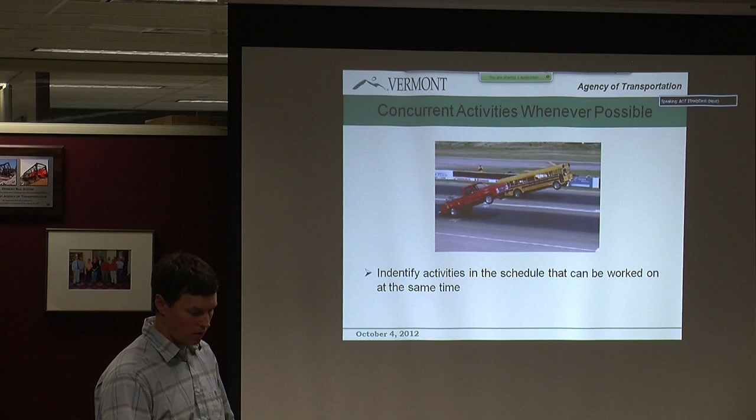Exercise flexibility to reach new heights. This is what we're all trying to get for you folks, really, and Jen mentioned it earlier about getting you folks to look at ways that you can exercise flexibility in the activities that you do.

For example, we've had NEPA documents completed with one layout sheet. I know there's activities in right-of-way that you can do before the NEPA process is complete. We've had a couple of ER projects go through where we submitted pre-contract plans and final plans at the same time. So again, it goes back to the concurrent - getting processes and activities to happen concurrently to help speed along the process.

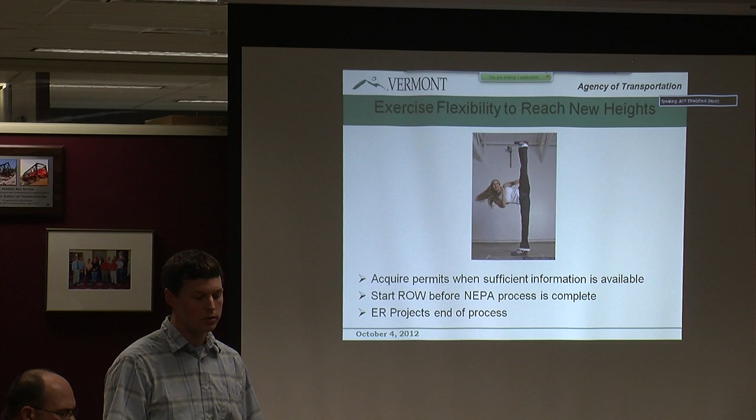So this is really about getting you folks to be flexible in the standard way, kind of repeating what Wayne said earlier about looking at your activities and seeing what you can do to be flexible with the rules, and help us along with accelerating projects.

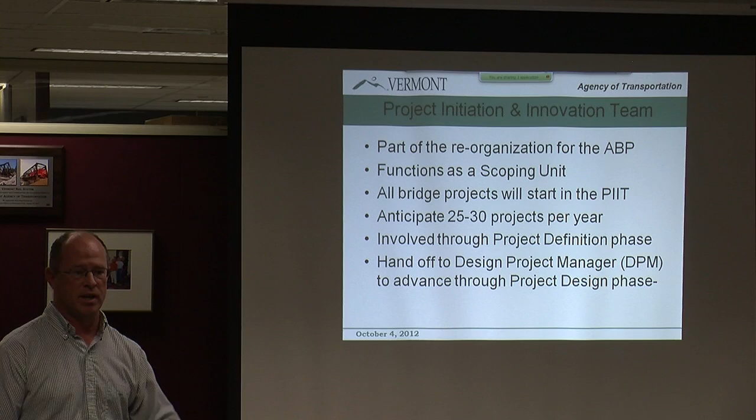The idea is that all projects that come into the bridge section will all go through the PIIT before they get sent off. We anticipate about 25 to 30 projects per year - that's what we're thinking will be about a steady state coming in and going out. We're going to be involved through the project definition phase, and then when we're done defining the project, we're going to hand it off to the design project manager, who will carry it through the project design phase.

Before the PIIT, there were some problems with the way we did things. We knew there was some room for efficiencies. What would happen is we'd get a slug of projects and distribute them to all the different project managers. At that point, we're all competitive people, especially Kristen and I, and we'd start competing for those resources, trying to get it in the schedule, and all the project managers would be competing for moving their projects ahead.

And this made it really difficult for the resource groups all the way along the line. They'd get all these requests at the same time from different people, didn't know how to prioritize them, made it really difficult for those folks.

The other part of it was each project manager has a different tolerance for how much risk they want to take. It's sometimes a little bit of a struggle bringing innovative things through, and some people like that struggle and others would rather just move ahead. And so what that created was different, inconsistent approaches to projects.

In the PIIT, the idea is we have a consistent way of looking at projects - we know the technology and the tools available, so it's a much more consistent approach to our scoping process now. We have a few focus areas.

We have a lot, don't have much time, so I'm only going to go over these.

First is early coordination with stakeholders. The idea of the old days where a set of plans would be plopped on your desk and they'd say do this, they're gone. Right now, you're all going to be involved day one. We're going to get you early on in the process, and we've had some really good success in getting stakeholders involved early. We want to streamline the process as much as possible.

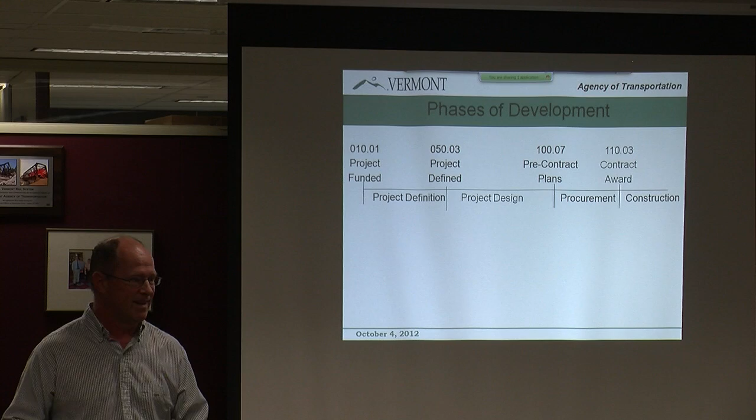And we're not there yet, but it's a starting point. So we need consistent milestones in order to measure.

We're going to add new data fields. The old days of having a spreadsheet with a list of projects that are in the Accelerated Bridge Program, they're gone. Nowadays we have a field that we've created, Screen 36 in PPMS, where we can say Accelerated Program, Bridge Program, yes or no. So we're creating these new data fields as needed so that we can use them and provide that information in a much more efficient way.

We've got to get the baseline data. We don't start by saying we want to meet certain expectations - well, we do start with some expectations, but really it's about capturing where we are now. If you don't know where we are now, you don't know where you've got to go to. And track changes over time - delta T for those engineers out there, right? We want to report quarterly or monthly, and then we want to see what the change is. Are we getting better? Are we getting worse? How are we doing?

So we have to start that way, and then the most fundamental, basic, important thing here is we have to see how we're doing and then revise it and change it when necessary. That's a really important part. It's really hard to talk about performance measures in 5 minutes or 3 minutes or whatever they've given me, but I'm going to try.

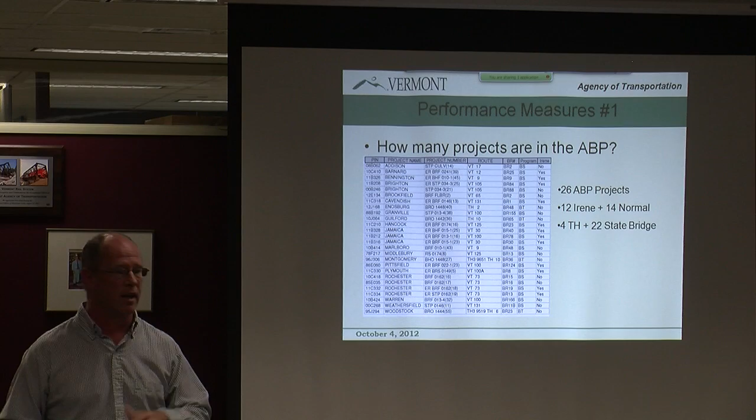This is a screenshot of a query that I did on the bridges in the Accelerated Bridge Program. There's 26 of them: 12 are Irene projects, 14 normal, and there's 4 town highway projects and 22 state bridge projects. So we have all this data, it's all in a database somewhere. Everybody here can query on it and get this information just like I did here.

There's some other measures that we're looking at. What percent of all projects are in the Accelerated Bridge Program? So of the 42 projects that were funded in 2011, 15 of them, or about 36%, are in the Accelerated Bridge Program. That's pretty good, that's above where we really wanted to be.

2012, we're down to about 15%, and I'll note that it's because we haven't finished the project definition phase yet. There will be more, and we're expecting somewhere in the 30s for that as well.

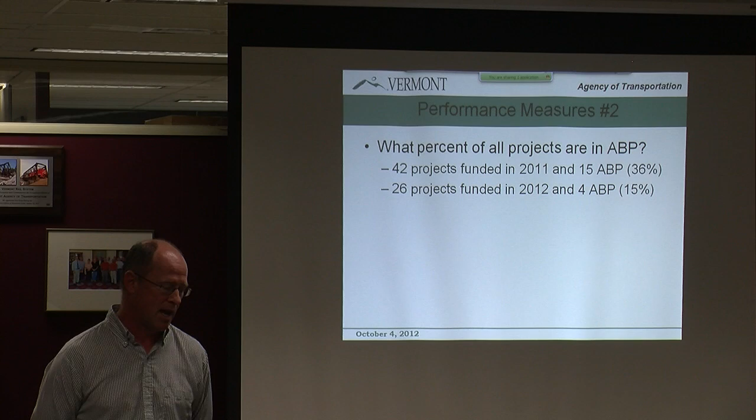And the duration of project definition phase, that is my group moving from funded to project defined. Again, we've got to break it down by years, and 14 projects in 2011 range from 9 to 463 days. Here's my point: because we didn't have a consistent way of doing this, everybody was defining the project differently, and so we have this really, really wide variation because nobody was that concerned about making these consistent like we are now. You can see in 2012 there's only a couple of them, but it's really improved.

Getting through that process for the ones that were funded in 2012, we got through it in somewhere around 6 months or so. So it's giving us some data. We know that some of the data now is pretty bad stuff. I took out the negative durations, I will add, when we went through it in negative time.

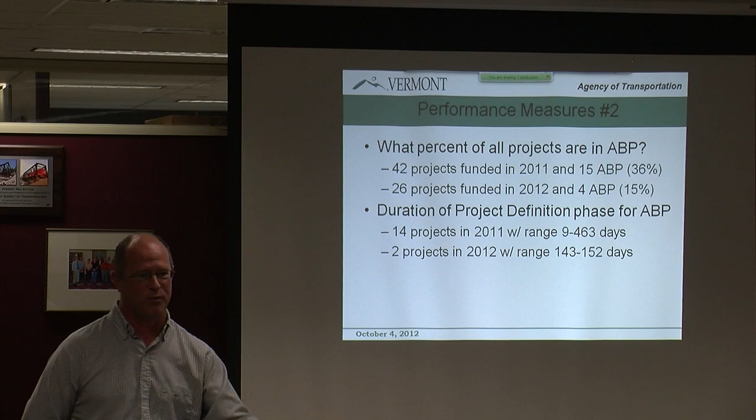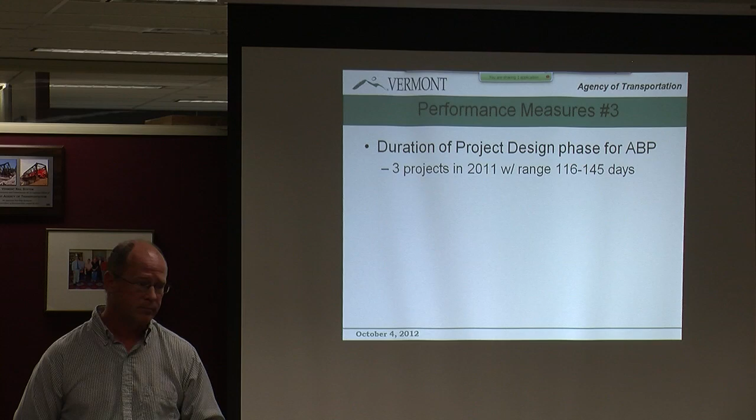And the last one here I've got is the duration of project design phase. Only 3 of them have been done, and that is from when the project was defined all the way through to pre-contract plan submittal, into the procurement phase. Those 3 projects average about 116 to 145 calendar days. So this is just a few quick examples of some performance measures, and there's lots more.

So some of the questions: where are we spending our money? Don't you think it would be nice to know where we're spending it? By section, by activity, even by person. We want to get there where we can drill down and find out where we're spending that money. Where are we spending the time?

Are there durations and activities that are just really, really long? And then you've got to start questioning why is it taking so long. Let's look at that and let's address it if it keeps on happening. Where are they located geographically? We've got some maps, and so we're putting different projects around geographically so we can see where the work is being concentrated.

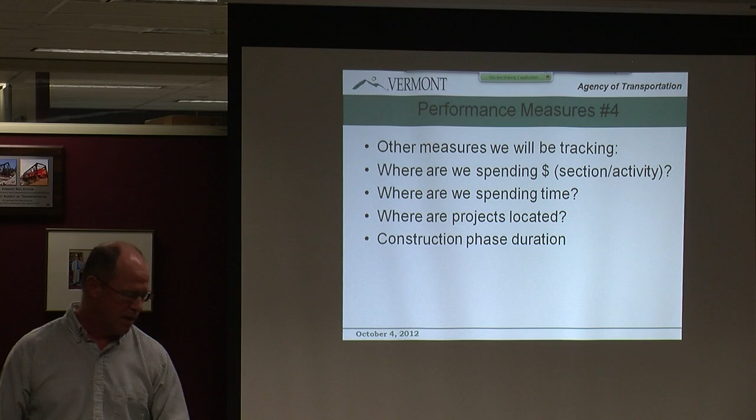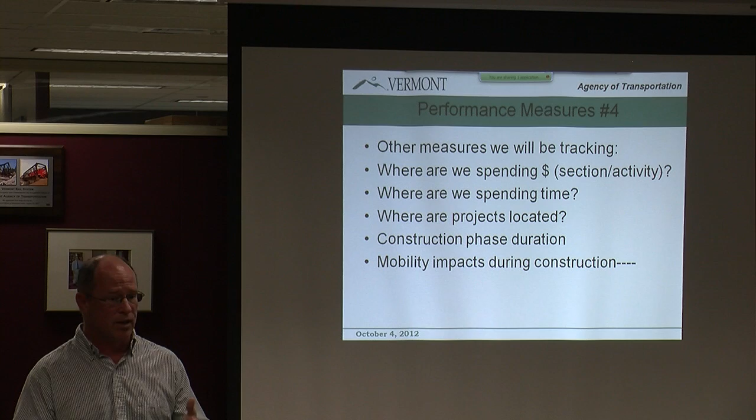And then we also want to start looking at construction duration, how long it's taking, and mobility impacts. They're more and more important as we move forward. Mobility impacts, how are we affecting the traffic? Every day that we're out there and interfering with the traffic flow, that's a mobility impact. It's hard to quantify it, but it's really important to the public, and they're our customer, I believe.

And now I'm going to turn it over to Wayne Simmons, and he's going to wrap it all up.

All right, I'm going to wrap it up really quick with some sort of summary and key points. We started off this presentation talking about the need to accelerate our project delivery. Our funding is variable, and it looks like it could be variable into the future, and sometimes we don't have a long duration to plan and design a project, so we have to change.

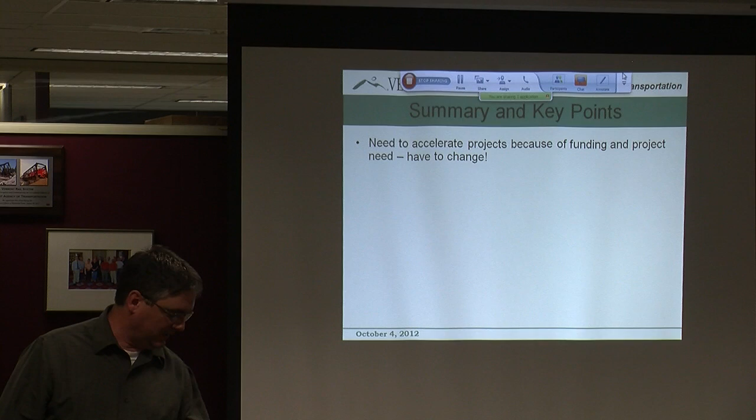We've developed and shared with you our goals and objectives for the Accelerated Bridge Program. It's innovation, it's communication, it's technology, sort of the themes that have run through all of the presentations today, and I'll throw in flexibility as well.

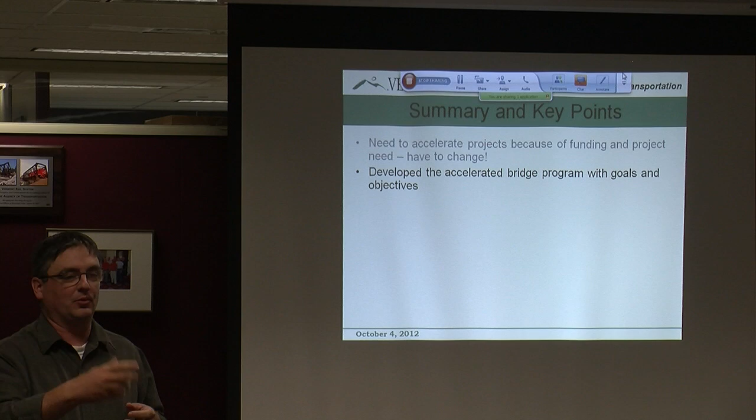So you've kind of heard what has been accomplished so far, with many of you folks helping along the way, and we're making progress. But I think that we feel like there's still other things that we can do, and there's a long way, and we'd really like you guys, your section...